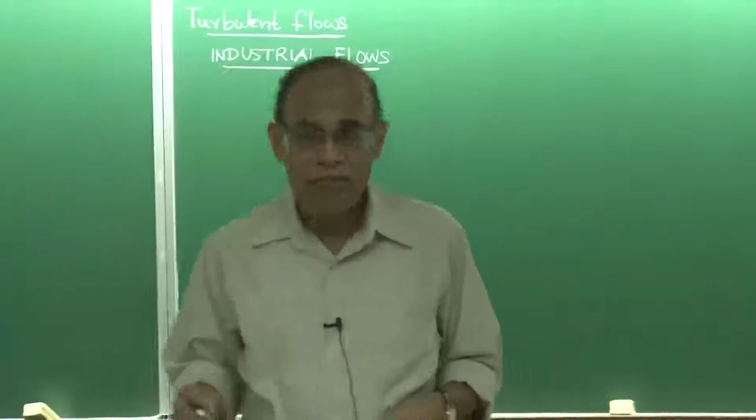So far I have classified flows on the basis of compressible versus incompressible flows, steady versus unsteady flows, one dimensional versus multidimensional flows, and another classification which I have just mentioned: the distinction between laminar and turbulent flow, where laminar flows are basically low Reynolds number flows.

Reynolds number, if you remember, involves the characteristic length and the kinematic viscosity in the denominator - it represents inertial force to viscous force. I have also briefly mentioned the dimensionless numbers that are important to fluid dynamics.

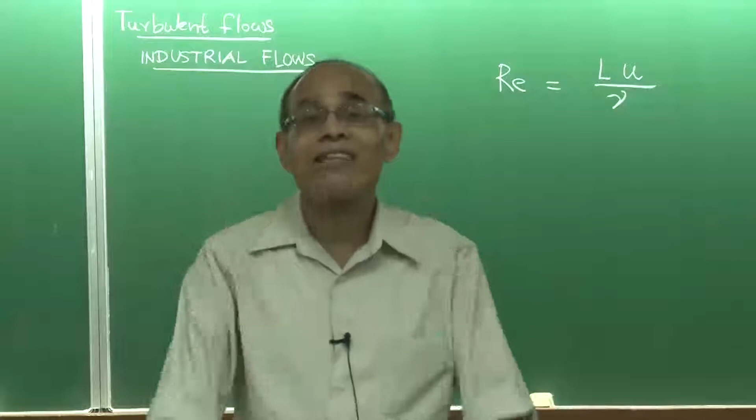If you remember the creeping flow around a sphere which I talked about in the context of Stokes law, there I was talking about Reynolds number of the order of 0.1 or less. So in such context, when the Reynolds number is 1 or less than 1, we see that the viscous forces are as important or more important than the inertial forces, and then the flow really becomes laminar.

But in contrast, if you get a value of 1000 or 10 to the power 4 or 10 to the power 6, which essentially means the viscous force is nothing in comparison to the inertial forces, that is when we see turbulent flows.

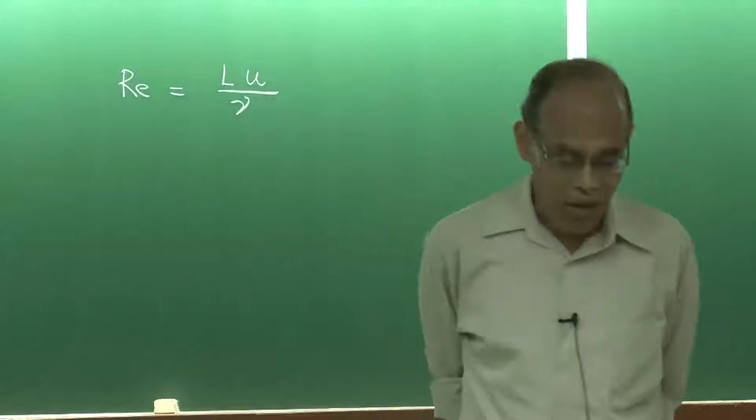Now, what are the general characteristics of turbulent flows? Turbulent flows are basically fluctuating flows. So if the flow is laminar, and if you put a probe inside, suppose this is the velocity and this is an instantaneous velocity.

Now, if I say I want to plot this as a function of time - so I have a reactor, I have put a probe inside located or targeted at a certain point, and suppose the system is under steady state condition, that means the velocity is not changing as a function of time.

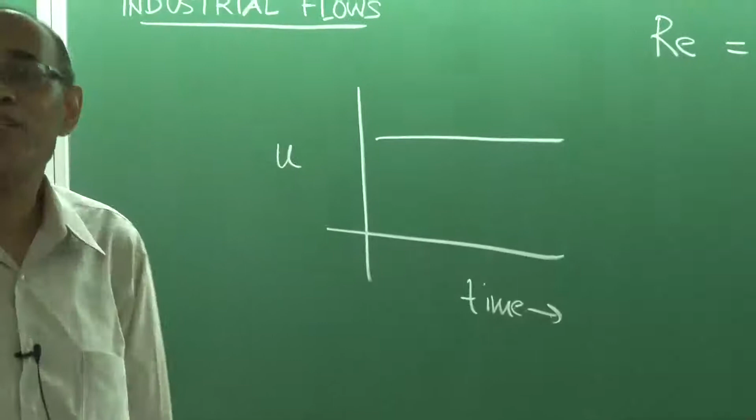So if it is a steady flow and a laminar flow, the characteristic response curve that my equipment or sensor registers will be a horizontal line parallel to the x-axis as a function of time.

On the other hand, if the flow would have been turbulent, we would have noticed high fluctuation superimposed on the mean line itself. So turbulence is basically fluctuating flow.

You can see that sometimes the velocity is above the mean line, sometimes it is down - so it is fluctuating around the mean line.

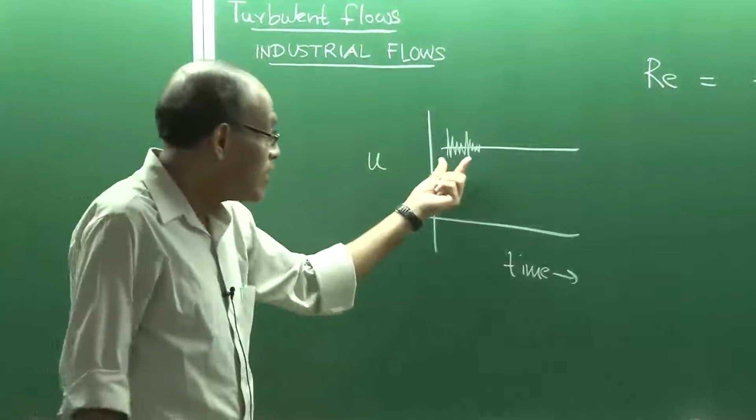These are characteristics of a steady turbulent flow, and these fluctuations have a frequency - if we are talking about low turbulence, the frequency could be something around 10 to 100 hertz. If it is very strong turbulence, we can have something like 1000 hertz or 1 kilohertz even.

Now, the characteristics of turbulence - it is said that it is basically chaos, but chaos need not always be turbulent. The turbulence originates in a system because it necessitates some shearing action.

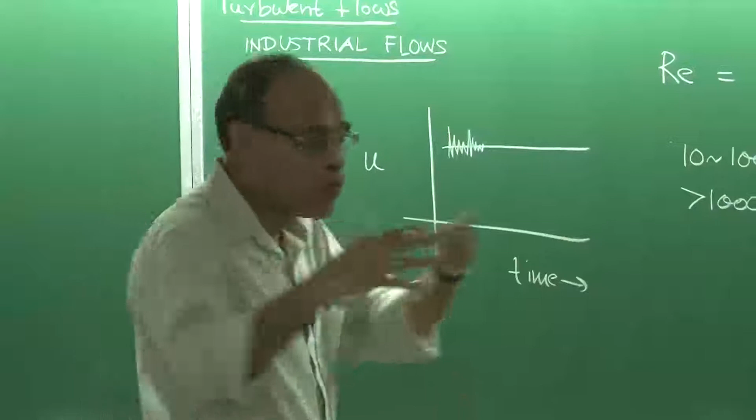So if you have no wall, for example, if there is smooth flow, in that case you may not see turbulent flow even at a very large Reynolds number.

So when you have a pipe flow at a very low Reynolds number, if we assume it to be laminar flow and fully developed flow, then what we encounter is a parabolic velocity profile. I have made half the deductions in class where I have not explicitly shown the Hagen-Poiseuille equation, but I have shown that if the flow is pressure driven and fully developed, simplifying the Navier-Stokes equation gives a parabolic velocity profile, as I demonstrated in class.

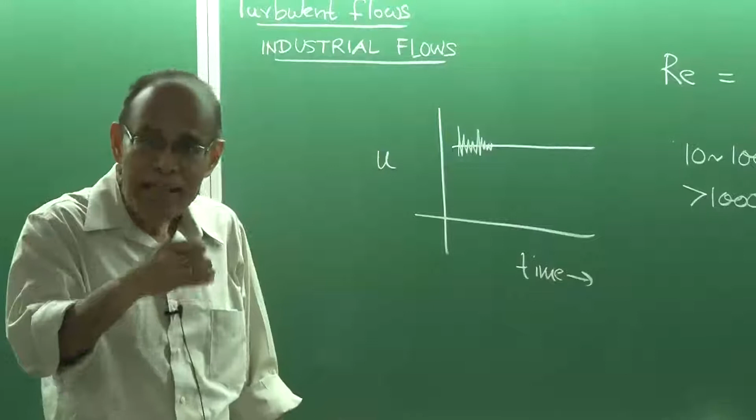That means if I drop an ink into the flowing stream of fluid, you will see that the fluid is following a certain path. It is neither fluctuating this way nor moving that way, suppose if it's in a fully developed region. So it has a streamline pattern along which the dye moves without showing any fluctuations.

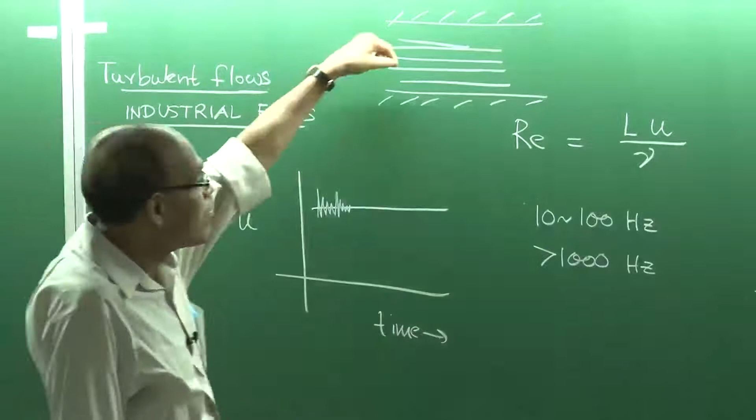But the moment the Reynolds number increases and you put a dye here, what happens? You will see downstream fluctuation, the dye will start to spread in the system, and that shows the flow has really become turbulent. So the disturbances may be due to the Reynolds number itself, friction at the wall, a bluff object, or additional reasons - some kind of disturbance has to be precipitated.

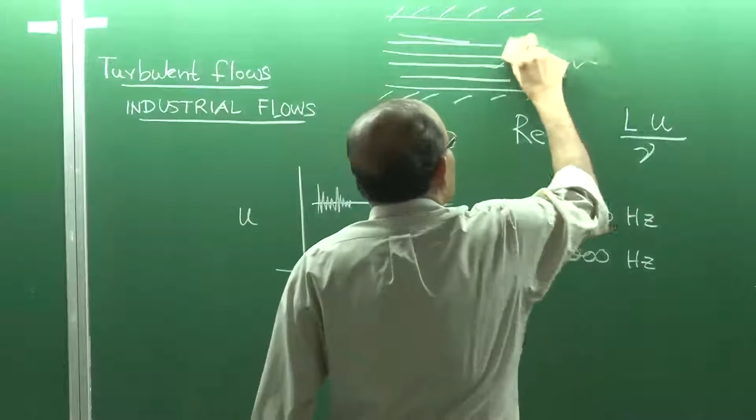So if you just increase the Reynolds number, the next stage - stage 2 - you can see the streamlines will be there, but somewhere a disturbance will set in. This is the disturbance I'm talking about that sets in when you increase the Reynolds number, and there flow separation is going to take place. So this is stage 1, you can see clear cut streamlines. In stage 2, the disturbance has precipitated into some kinds of local vortices.

Then in the third stage what you can see basically is something like this - you have a strong rotational motion, and these are the streamlines.

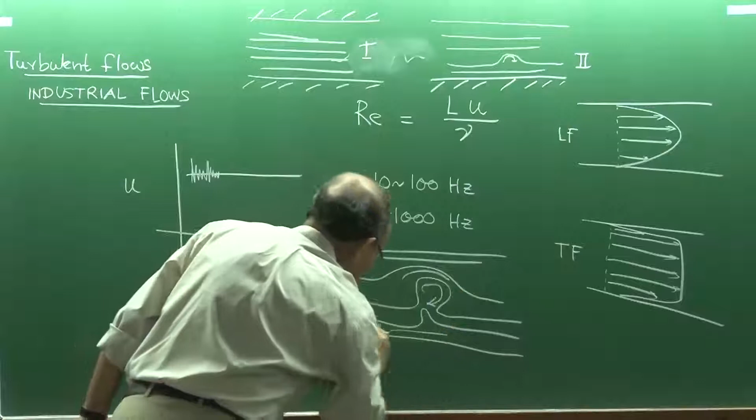As I've said, this sort of feature at high Reynolds number gets amplified and generated, and there could be various reasons for this. One important reason is, as you can see, there are walls here, so we experience shearing flows, and shearing flow is a necessary cause to introduce turbulence into the system.

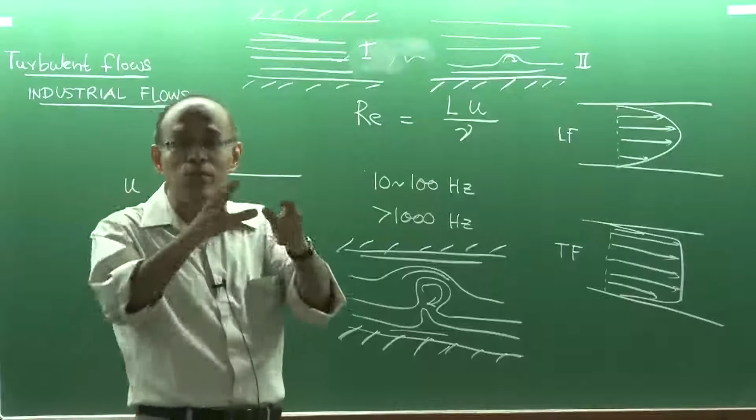If you have diverging flows, for example, that can also precipitate into turbulent flow or such rotational systems. Also, if you have bluff objects or solid objects, fluid strikes and flow separation takes place, which also generates turbulence. So shearing flows, walls, bluff objects, and diverging geometries are all features that precipitate the formation of these rotational disturbances.

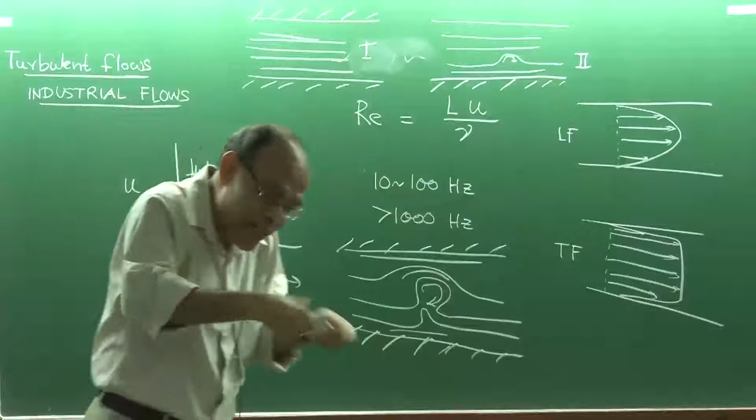Ultimately what happens is you have pockets of fluid, and at many places there are discrete rotating components, with a mean direction of the flow. These rotating components have their own rotation and advance along with the flow, but they themselves have a rotational component - these elements are called eddies in a turbulent flow, and these eddies move along with the mean path of the flow, having rotational components.

Therefore, we say that when you have turbulent phenomena, there is nothing like a one-dimensional turbulent flow. Turbulent flows could be a multi-dimensional feature. Turbulent flow is basically fundamentally an unsteady feature, because there is going to be velocity fluctuation in the instantaneous velocity all the time.

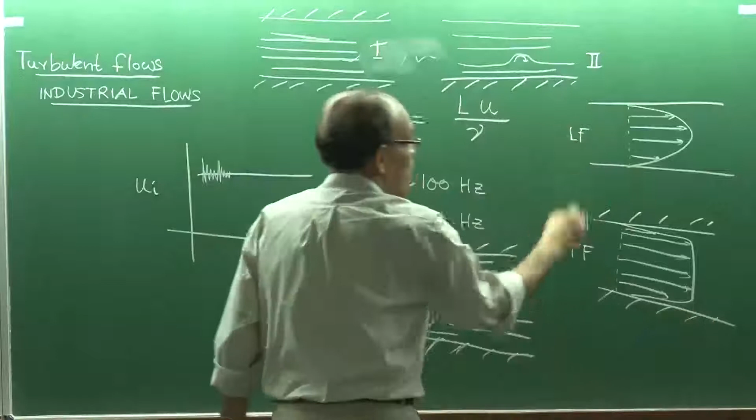This equation, as you all know, is equal to Vz. If z is this particular direction, then Vz is equal to Vz max into 1 minus r square by capital R square, where capital R denotes the radius of the vessel.

And in this particular case, the velocity profile is substantially changed, and it is equal to Vz max, and that is equal to 1 minus r divided by capital R, raised to the power 1/7.

So, most of the time what we are going to see is that a turbulent flow is essentially unsteady, essentially multidimensional, and essentially has a large Reynolds number also.

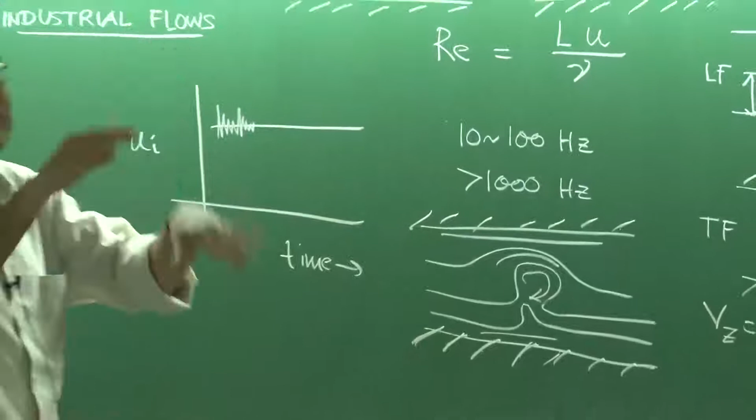Now, these rotating components which we have called eddies move along with the direction of the motion. The eddies exhibit random three-dimensional motions, where rotational characteristics are an inherent feature of turbulent flow itself. Now, if we plot the inverse of eddy size...

We must understand that the local Reynolds number is going to be much smaller here, close to the wall, but very large at the center. The local Reynolds number is small near the wall because the velocity is 0 there. If velocity is 0 at the wall, the Reynolds number is basically equal to 0, and as you go away from the wall, the local Reynolds number progressively increases.

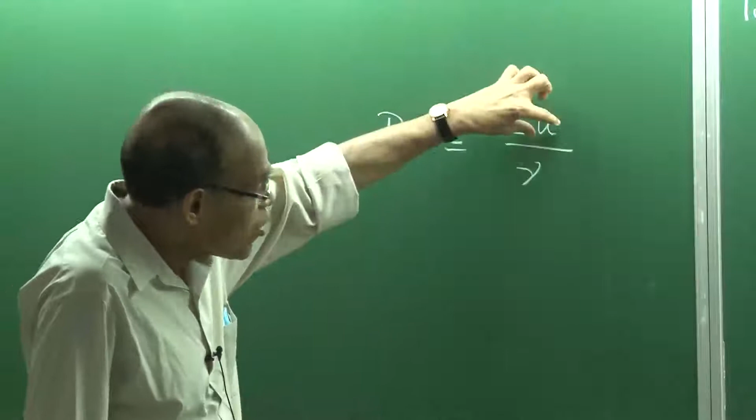As a result, you get bigger size eddies away from the wall, and as you go towards the wall, you get smaller eddies. Smaller size means a smaller Reynolds number for the eddies, so the eddying size has to be small, and the velocities themselves are small. So towards the wall, it becomes essentially a viscous flow.

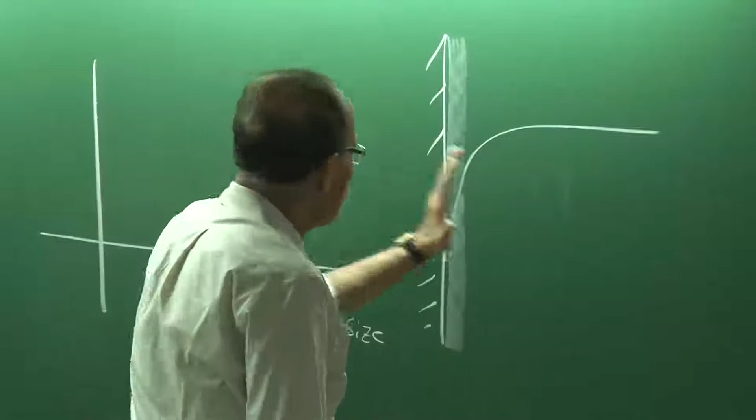So in that context, around a solid surface, as I have indicated, the flow can go something like this, and there is a concept of a boundary layer. If this is the solid, in that case we can have a fully turbulent regime here, and this is the other end, the solid wall.

This is how the velocity varies as a function of distance, say x, and this is a v versus x profile. So this velocity essentially starts at 0. If this is the scale of the velocity, this is v equal to 0, and then this becomes v equal to v infinity, or the free stream. This sort of variation gives rise to what is known as the velocity boundary layer.

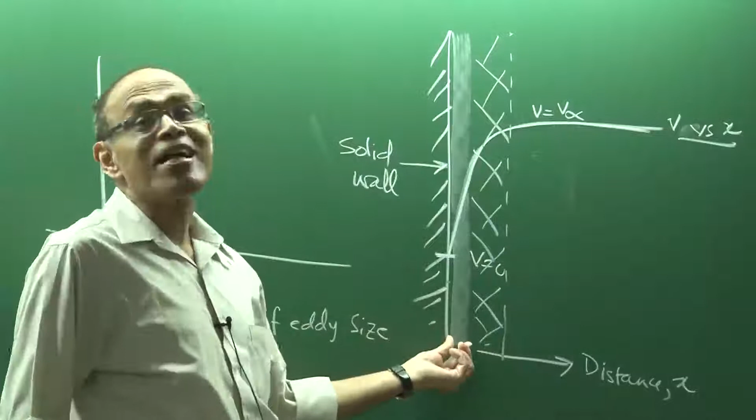In that boundary layer, we can have two different regions, or it can be separated into three different regions. One we call the laminar sub layer. Why laminar? Because here there is no turbulent flow, since velocity is approximately equal to 0, so the Reynolds number approaches 0.

Immediately after the laminar sub layer, you can have a buffer layer where the flow may be partly turbulent, partly laminar, because there is moderately high viscous force, but not entirely high enough to dampen the inertial effect. And then we go to the bulk, which is the main turbulent flow of the system.

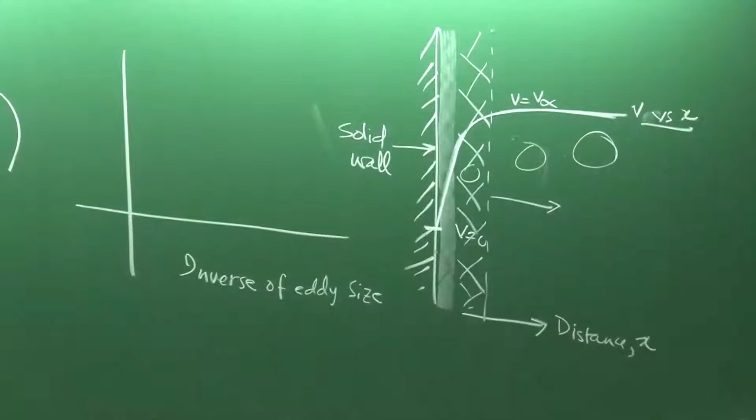Now, if we look at the eddy size distribution, we will have eddies here, here, and here. We will say bigger eddies occur here, because the velocities are going to be larger, and as a result the length scale is going to be larger. So here these eddies will contain most of the energy, and if we plot this eddy energy against inverse of eddy size, we get a graph like this, where this is small or smallest eddy, and this is large eddy.

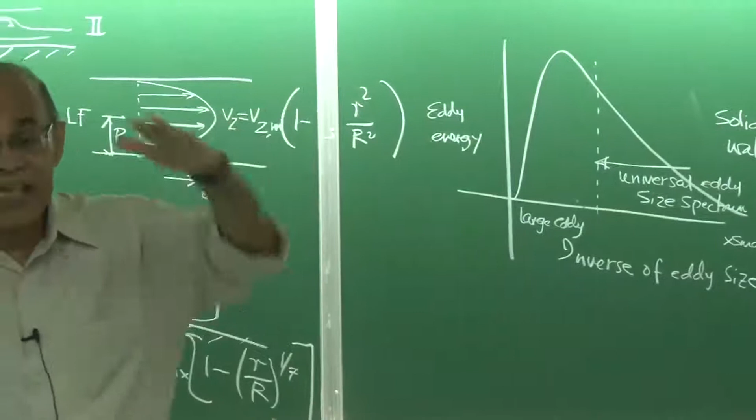And there, this part is called the universal eddy size. These large eddies contain the maximum amount of energy, and their size will depend on what kind of flow it is - whether it's flow between two pipes, parallel plates, or flow in a tank with a free surface and five different walls: two on the side, two on the front and back, and one at the bottom. This is one geometry, so we will have one sort of size of eddies there.

These big eddies are problem dependent, system dependent, geometry dependent, and their size is determined by the main characteristics of the flow, containing most of the energy. But if you go away from these main energy containing eddies, you enter a universal eddy size spectrum, which is characteristic of most shearing flows, and there you find the size we are talking about.

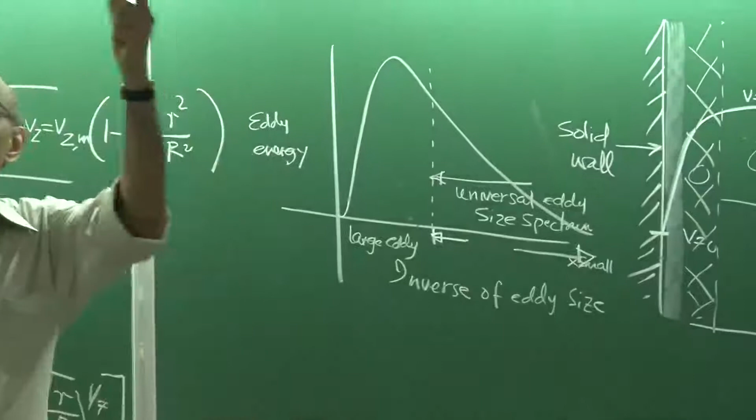Through this spectrum, energies pass from bigger to smaller eddies, smaller to smaller eddies, smaller to smallest eddies, and then ultimately it manifests as low grade thermal energy through the phenomenon we call viscous dissipation.

Viscous dissipation is negligible in the core of the flow. On the other hand, viscous dissipation becomes more and more pronounced as you go towards the wall, and that dampens the flow, bringing it to zero, where the Reynolds number will become zero and turbulence becomes non-sustainable.

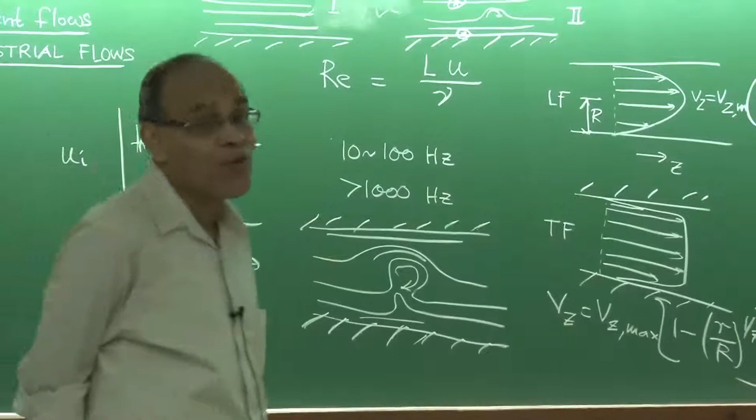Most of the industrial flows we encounter are going to be turbulent in nature, simply because we have high Reynolds number flows. Also, as I have said, turbulent flows are unsteady flows basically, and turbulent flows are multidimensional flows. So in industry or in metals processing units, we will mostly have unsteady, multidimensional turbulent flows.

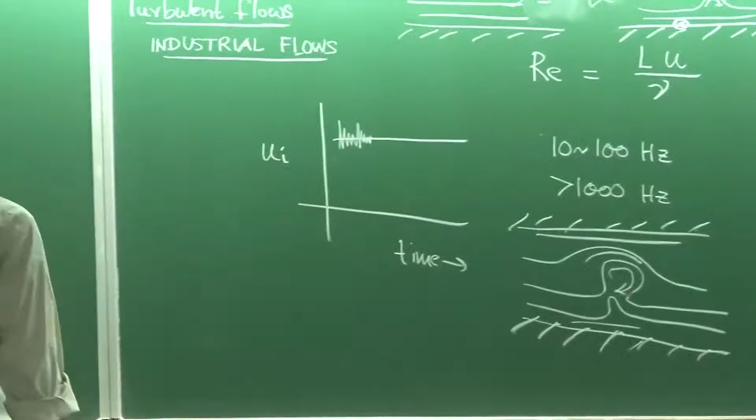That is going to be the characteristic of the flows we encounter, be it the flow of molten steel in a ladle, or the flow of electrolyte in an aluminum Hall-Héroult cell. All these flows are essentially turbulent because our kinematic viscosities are extremely small for metal, while the size of the industrial reactor is pretty large. So the characteristic length scale is large and the kinematic viscosity of the fluid is low, which makes the Reynolds number of the flow very, very high.

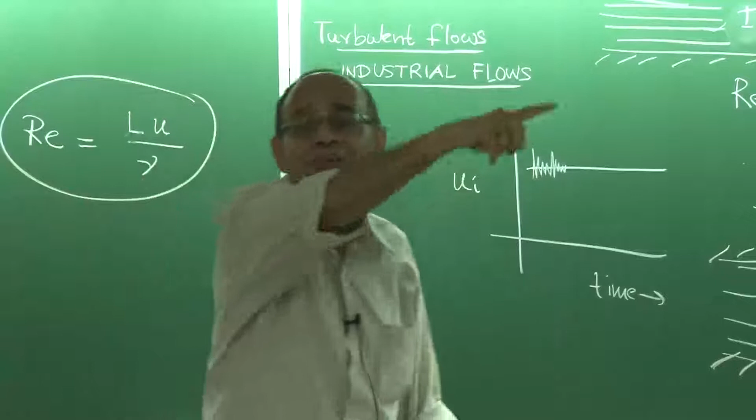So in industrial reactors we will mostly encounter high Reynolds number flow, or turbulent flow, and because our systems are bounded by walls and free surfaces, the flows are going to be mostly multidimensional. There will not be a predominant direction of motion. Within the container itself, the fluid will be recirculating, for example, because the fluid cannot go out of the container.

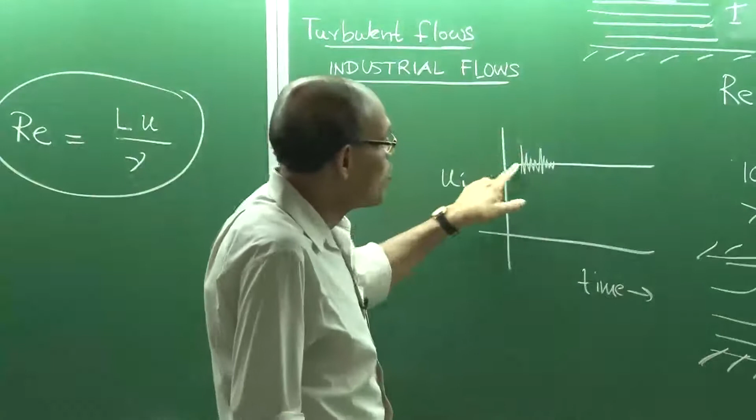Of course, the flow can be turbulent and can be unsteady also, because unsteadiness is a characteristic. But there is a formalism to deal with steady turbulent flow also - steady turbulent flow does not necessarily mean there is no fluctuation. It's a representation of a fluctuating flow with some sort of time averaging framework, so that you can extract meaningful information on the mean flow. You may not get exactly the fluctuating flows, but you can get the average of the fluctuating flows that determines or characterizes the turbulent flow itself.

One more thing I want to introduce is parabolic flow versus recirculating flow, in industrial flow context. In layman's terminology, parabolic flows essentially tell us that there is a predominant direction of motion.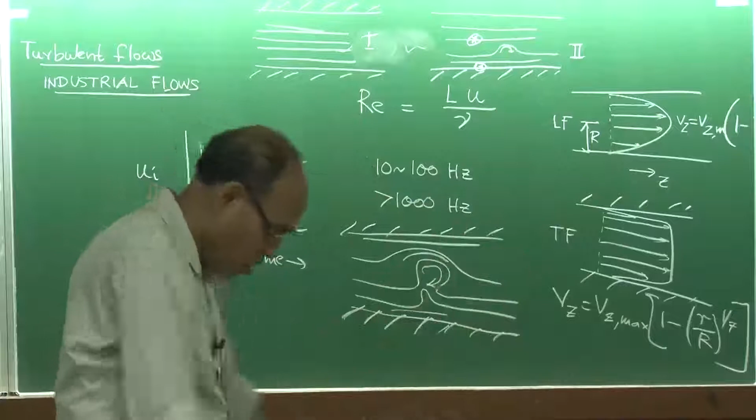So a pipe flow, for example - through the pipe the fluid is flowing along the z direction, moving from this side to this side. So there is a predominant direction of motion. There may be small motion in the transverse direction, but on the other hand, if you compare this to the flow in a vessel, for example in a cylindrical shaped vessel which contains molten metal...

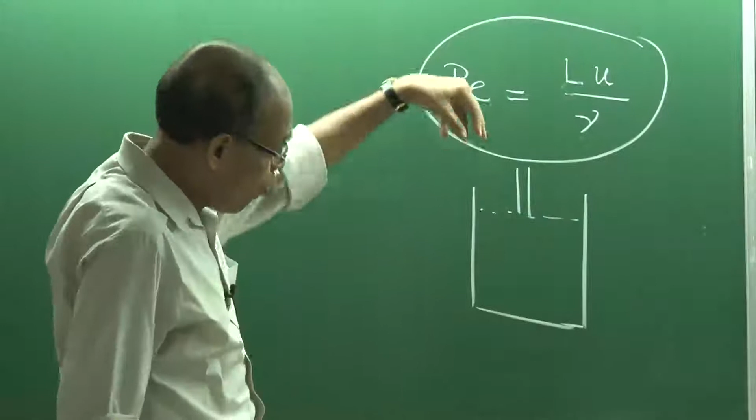Suppose you put molten metal or pour molten metal into such a vessel - this is the same scenario as you would observe in your bathroom, for example, when you open the tap just over the bucket. So what happens is the fluid in the bucket gradually builds up, and the flow in the bucket is a churning motion.

There is no predominant motion like what I have shown in the context of the pipe flow problem, where there is a predominant direction of fluid flow. This is the predominant direction of fluid flow, and that's how the flow is taking place.

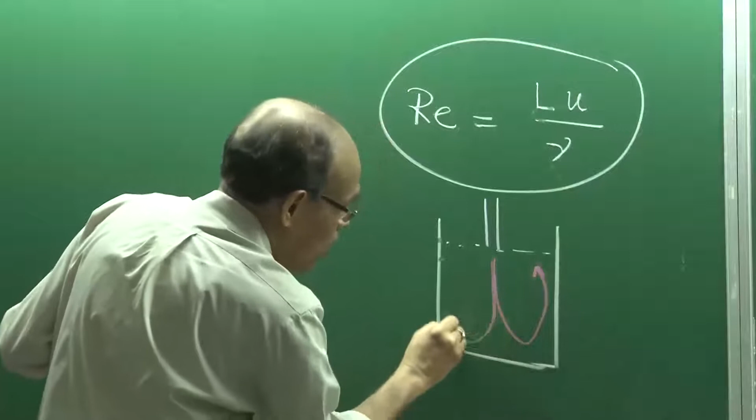This feature of a predominant one-directional flow is going to be absent when you pour molten metal into the vessel. When you pour molten metal, the meniscus gradually rises as you fill it. It's an unsteady state phenomenon, and you get a flow going in a particular direction - a clockwise moving vortex here, and an anti-clockwise moving vortex here. That is how the rotation really takes place.

You can observe this yourself. Next time you go to your bathroom, open a tap with a bucket underneath and do this experiment to see that you do not have a predominant direction of motion, but flow in different directions. The tap opens, the stream of water goes down, spreads at the bottom of the bucket, and then rises up from all sides of the bucket. This kind of flow, where we do not see any predominant direction of motion but has multidimensional flow characteristics, is called a recirculating flow.

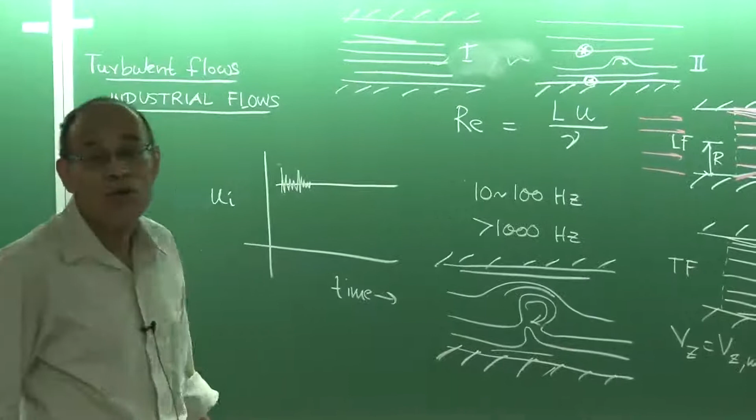So parabolic flows are those where we have a predominant direction of motion. Recirculating flows are those where there is no predominant direction of motion. Our industrial flows - for example, in the case of an aircraft moving high up - the flow over the aircraft could be unidimensional in nature, because the aircraft maintains a steady height and moves along a particular direction. There is a predominant direction of motion.

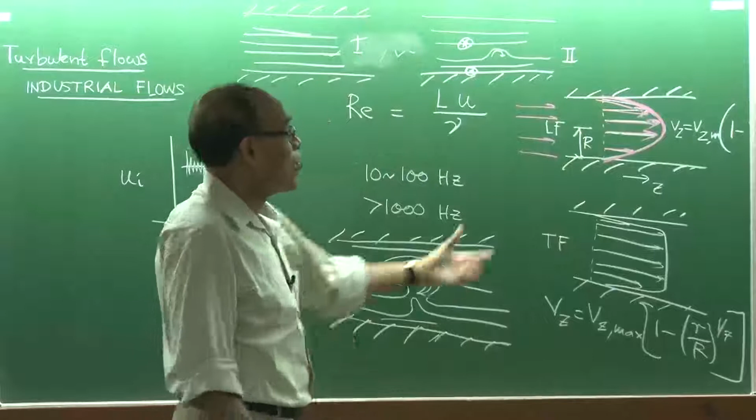On the other hand, in a metal processing unit, that sort of feature is not going to be seen. There are very limited scenarios where one can see a flow of this kind. One example is when you drain molten steel from a ladle, through a ladle shroud, into a tundish - the shroud looks something like a pipe. The ladle is there, with a shroud attached, which is a ceramic tube, and you drain molten metal into another vessel. The flow through this is akin to what I have shown here.

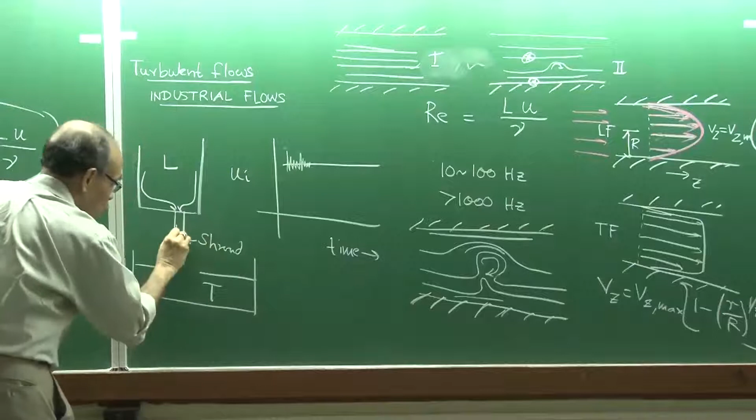So the flow here is predominantly one-dimensional through the shroud, but within the tundish itself, the flow may be multidimensional. This is the ladle, this is the tundish, and this is the shroud, which is a ceramic pipe - here the flow could be basically one-dimensional. But these are very special kinds of scenarios. In general, the flows we encounter in metal processing or liquid metal processing industries are going to be mostly recirculating in nature.

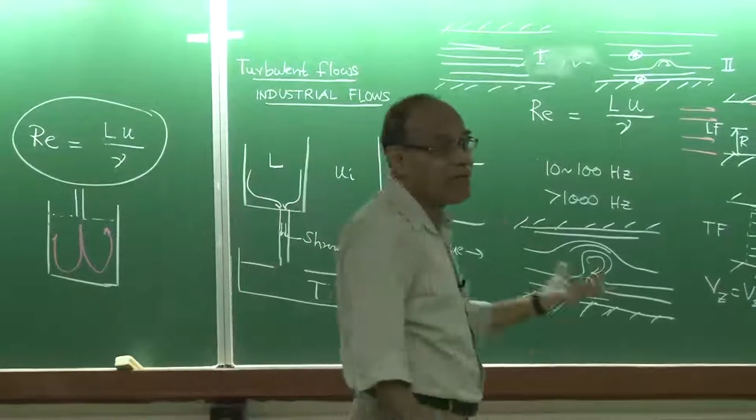Now, having said so, let us also understand that the Navier-Stokes equation I have written in its exact form retained the unsteady term - the 3 first order derivative terms on the left hand side, and the 3 second order derivative terms on the right hand side. So I did not make any assumption whatsoever, and the equations presented were the exact derivation.

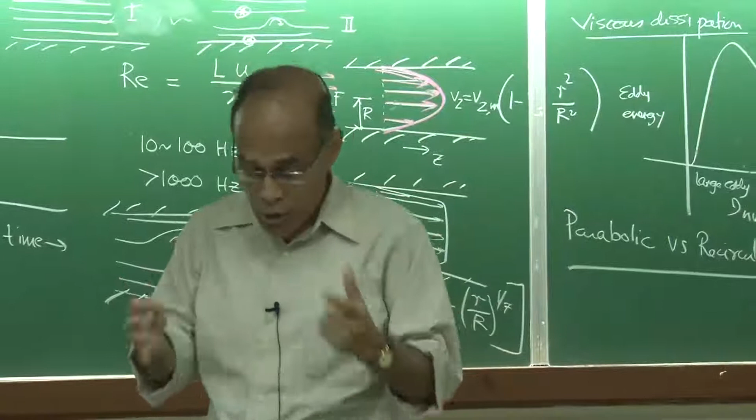In deriving those equations, no assumption was made about whether the flow is laminar or turbulent. So the Navier-Stokes equation as presented could be equally applicable to analyze laminar flow as well as turbulent flows. But there is a problem in trying to analyze turbulent flow with the Navier-Stokes equation, which I am going to discuss right now. The equations I have written, as I mentioned, do not make any flow characteristic assumptions.

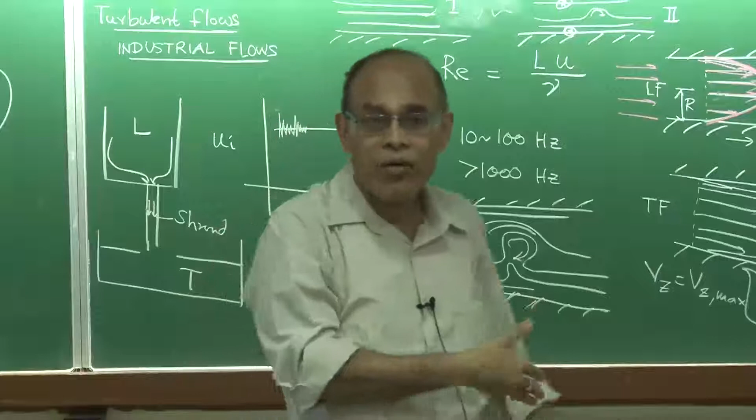The flow is either laminar or turbulent, which essentially implies that we can apply these equations to laminar as well as turbulent flows. But if you look at the equations, these equations are x direction momentum balance, y direction momentum balance, z direction momentum balance, continuity equation - 4 equations, 4 unknowns. They are non-homogeneous partial differential equations, they are non-linear equations, so they will basically not be amenable to analytical solution.

This is what the analytical solution comes out by simplifying the Navier-Stokes equation, making the fully developed flow assumptions, constant property, steady state, and all these assumptions, and then we could derive this by working it out with hand. But when you apply the Navier-Stokes equation in its entire form, because we have to apply an entire form, because no simplification is possible.

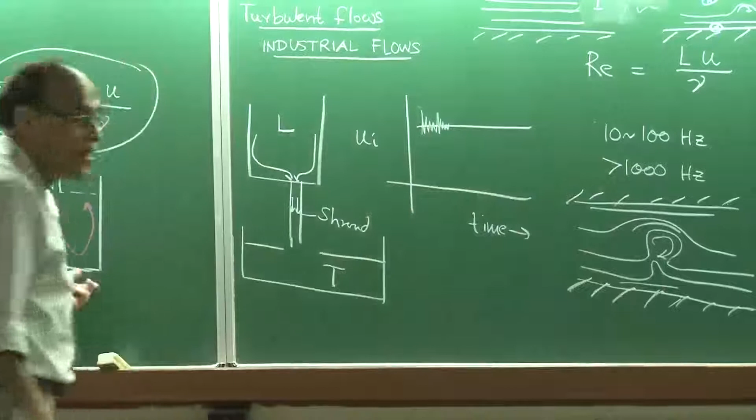It is unsteady state, it is multidimensional, it's high Reynolds number, it is turbulent. So therefore, no simplifications are going to be available here, and in that case we have to deal with the exact form of the Navier-Stokes equation. So that poses a problem that we will not be able to solve these equations by hand.

So we will have to have computational methods. We have to write a computer program in order to solve those equations. Now, there are many solvers which are available, or we call them commercial softwares, which are available to solve the Navier-Stokes equation.

So you just define the geometry, define the boundary conditions, and the 3 equations, or the 4 equations - that is the equations of motion and equation of continuity - they are going to be applied.

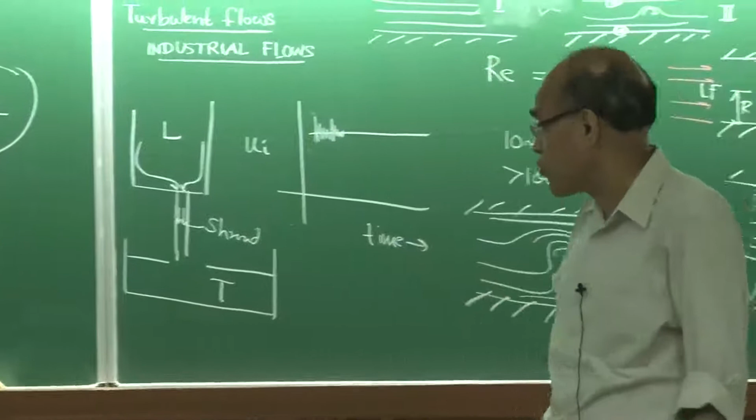So a numerical procedure: we have a differential equation, a partial differential equation, we apply a numerical method, then you get algebraic equations. And these algebraic equations are actually solved by the solvers, which we call commercial softwares.

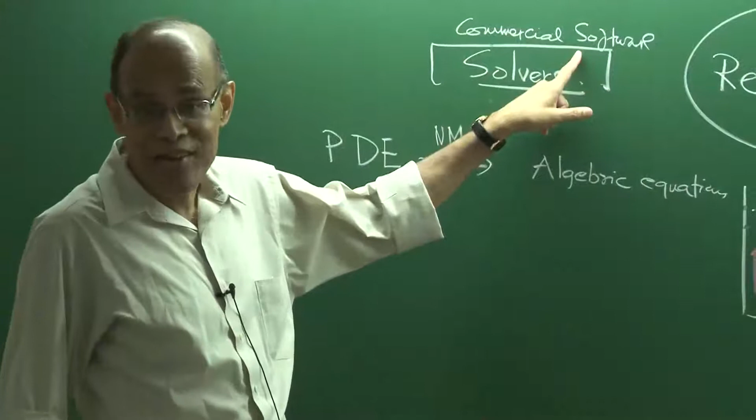Many of you will have a chance to use this commercial software during your tenure at IIT Kanpur. One such software that we have is Fluent in ANSYS. The other we also have, I think, is the COMSOL software, which allows you - they are Navier-Stokes solvers basically.

And you can have many permutations and combinations. You can solve a 3-dimensional problem, you can solve a steady problem, you can solve an unsteady problem. Your job is only to define the geometry and lay the numerical grids.

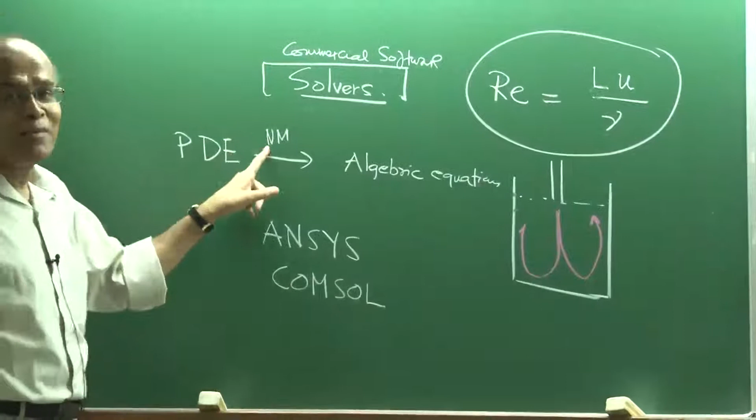Now, so what is the task of a numerical method? The numerical method is applied to transform a partial differential equation or an ordinary differential equation into its corresponding algebraic equation. So therefore, in order to know these solvers or do something tangible through them, you have to know the numerical methods also.

So this is an entirely different subject actually we will now get into - that if you want to solve the Navier-Stokes equation which you have derived in this class for actual industrial flow, in that case you cannot do it by hand, you have to write a computer program. Writing a computer program takes an enormous amount of time.

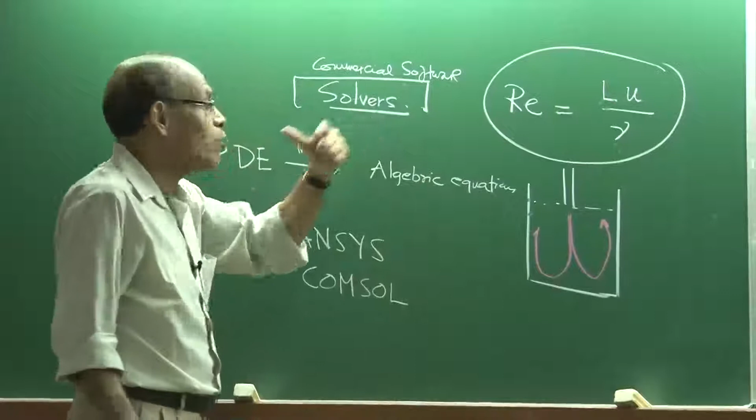So you take recourse to industrial solvers or commercial softwares, and these commercial softwares will be allowing you a platform to solve those Navier-Stokes equations which are applicable to your system. So as I mentioned, partial differential equations are transformed using numerical methods, and then you get algebraic equations, and these algebraic equations are solved - not in a continuous fashion, but at certain points which we call grid points.

So in a 2-dimensional domain, a grid is going to be constructed, and then these are grid points - I can say, or we can write like this also. So these are the nodal points at which we will seek the solution of the algebraic equations.

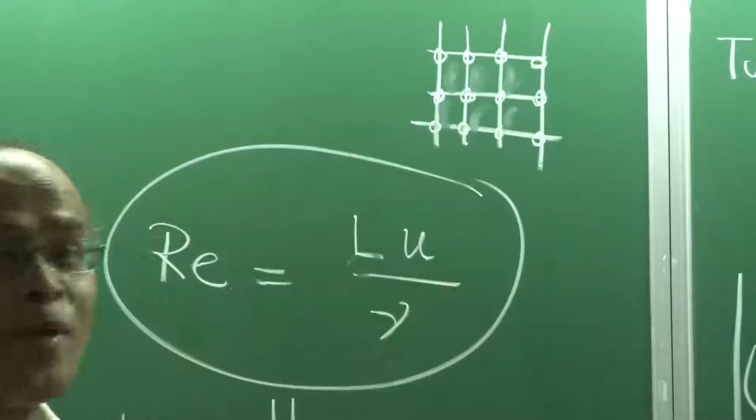So the domain discretization is done, a numerical grid is constructed, because you will apply a numerical method, you got the algebraic equations, now you have to solve these algebraic equations. For every node you will get one algebraic equation. So you will get many algebraic equations over the entire domain, and these you have to solve simultaneously.

So if you imagine a very large domain, you can have millions of such nodes and you can have millions of algebraic equations. So therefore, you will require a powerful computer in order to solve this.

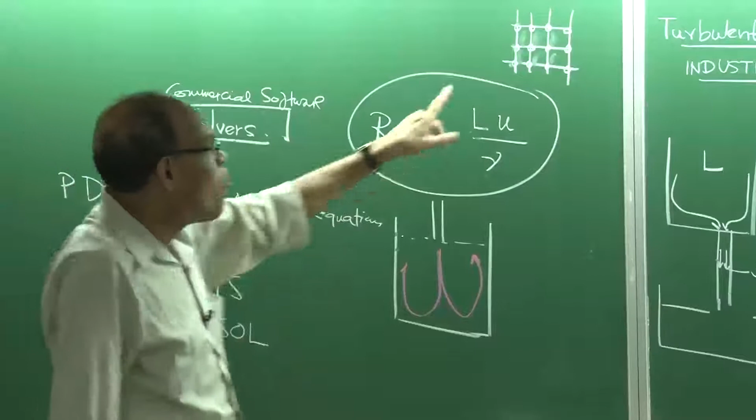Now, the moment you apply these numerical grids, what happens is that, if you remember, as I said, you have large eddies here, you have small eddies here.

So if the grid is not fine enough, then if you have a small eddy size, this kind of grid distribution will not be able to resolve the motion of the smallest size. Therefore, it becomes a big problem to apply the Navier-Stokes equation as it is and try to simulate an actual industrial flow problem.

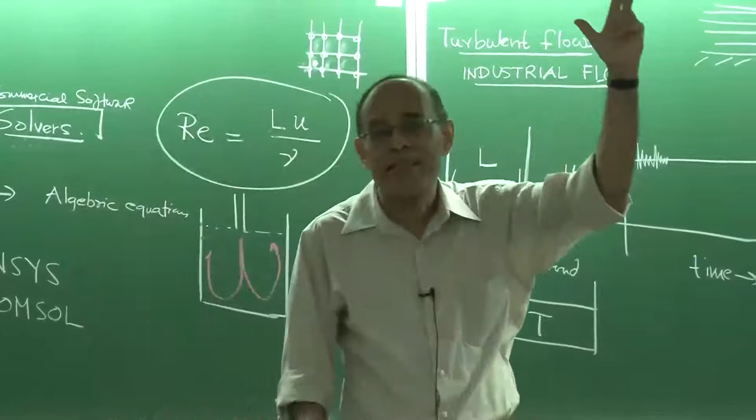This arises because you require a very fine grid to resolve motion across the length scales, from smallest eddy to largest eddy. If you want to simulate everything in a huge domain like 5 meter by 5 meter, the size of a metals processing reactor, you may need 10 million, 20 million nodes. And with unsteady state flow and small time steps, one calculation could take 1 month, 3 months, 5 months.

We have not been able to do this for our full scale reactors, this kind of simulation where we can resolve exactly the motion across all length scales. If you can resolve this, that procedure is called direct numerical simulation.

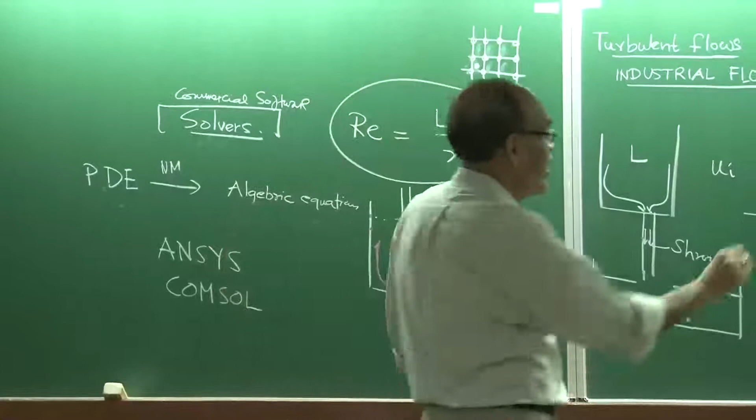Direct numerical simulation means you have not made any assumption in solving the Navier-Stokes equation. You apply a computer program, solving the equations across the length scale, and you are able to predict the motion, or calculate the velocity fields.

This is DNS, direct numerical simulation. It is an exact simulation of turbulent flows, but it is very expensive and time consuming for actual industrial flows. So we really do not do it for every analysis of every problem.

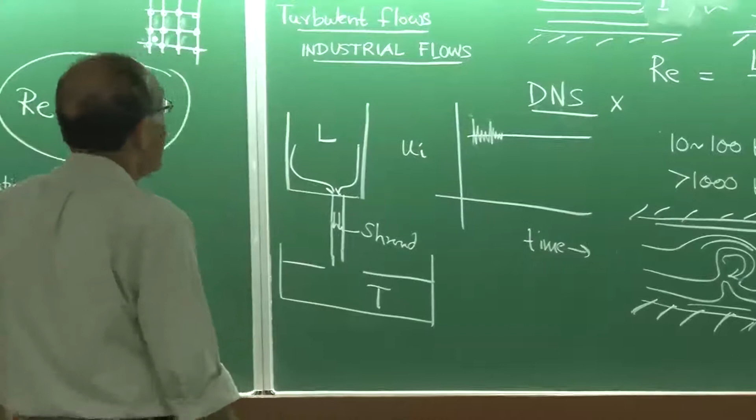So we resort to a mechanism called time averaging of flows. We will time average, and then by time averaging we will solve the Navier-Stokes equation. We now have a time averaged Navier-Stokes equation. Let me brief the time averaged Navier-Stokes equation.

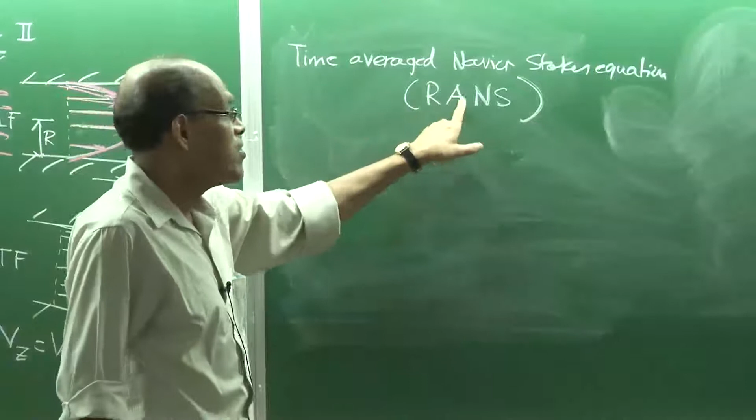This approach is also called in the numerical world as RANS, Reynolds Averaged Navier-Stokes Equations. The moment we time average, we will also have a time average equation of continuity, time average equation of x direction motion, y direction motion, and z direction motion. So we still have 4 equations, but in their time average form, and these 4 equations, as opposed to the original Navier-Stokes equation, are the time average Navier-Stokes equations, or in short RANS.

As I said, you have an instantaneous velocity, and this instantaneous velocity can be decomposed into a fluctuating velocity. Suppose it is an x direction velocity: that x direction velocity is a sum of the x direction time average and the fluctuation of the x direction velocity component. Similarly, we can have other components for y and z. Now the time averaging is basically done like this, and if you do this, the definition is as shown.

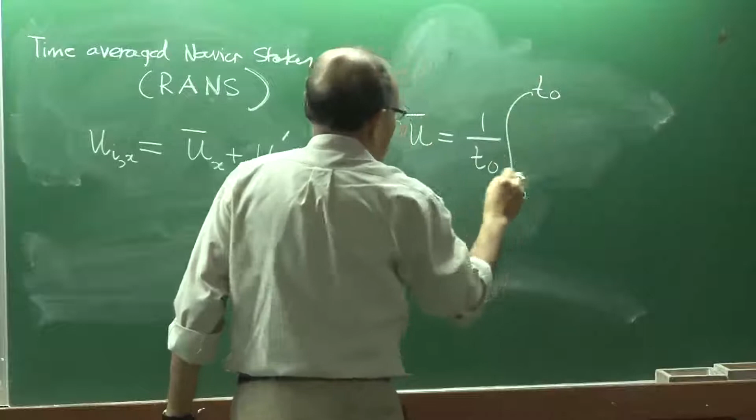We have to remember that the limit of integration matters, because we are time averaging it. So you can imagine that one is called space averaging, the other is called time averaging.

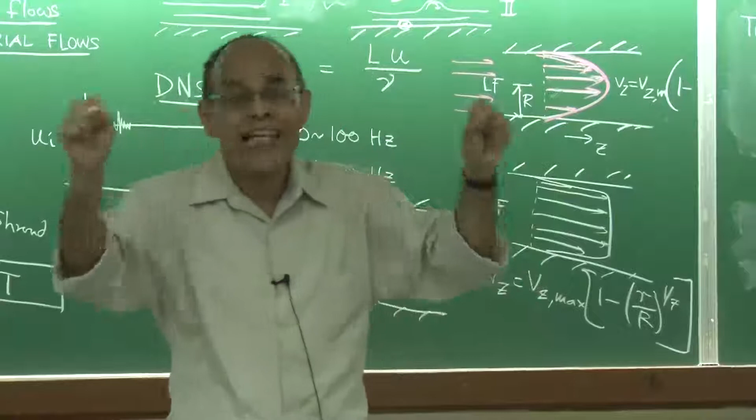Suppose you want to find time averaging in the context of rainfall in a certain month. Day 1 so much rainfall, day 2 so much rainfall, so what you are doing with day 1, day 2, day 3 is using these as time frames. So that number for the month of January or July is actually a time averaging of many data points collected over that particular month, giving you one representative value.

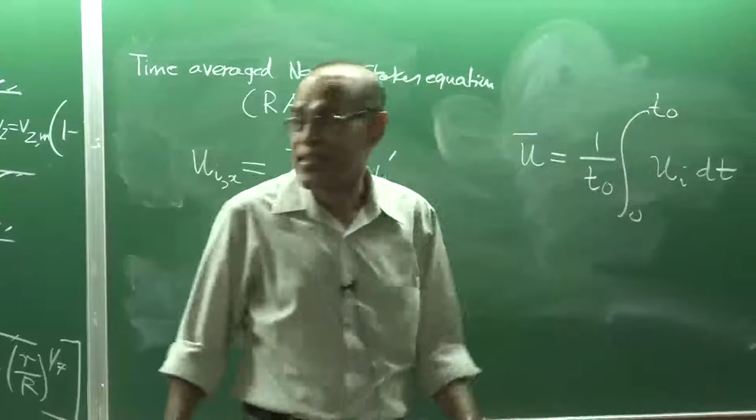So, that is basically the definition. One important characteristic here is the limit of integration must be higher than the frequency of fluctuations, because I want to capture, if I have one fluctuation like this over a time span 0 and t0, I am not capturing the fluctuation at all. So, the time span over which time averaging is done has to encompass a sufficiently large number of fluctuations.

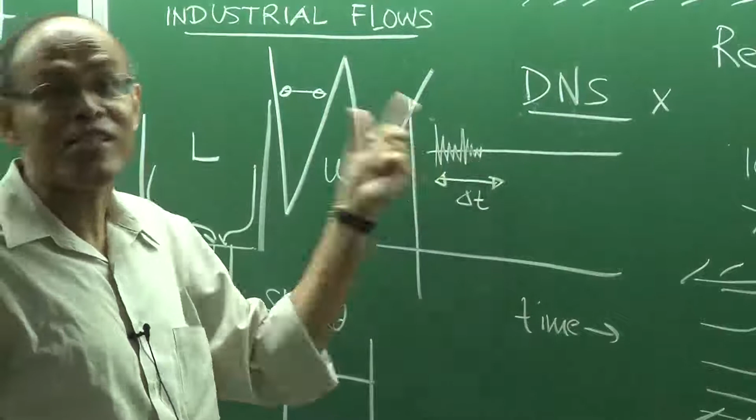So, I would say a delta t, a differential time, which is equal to t0 minus 0. That delta t must contain a large number of fluctuations, so this time period must be larger than the time period of fluctuations of the turbulent flow.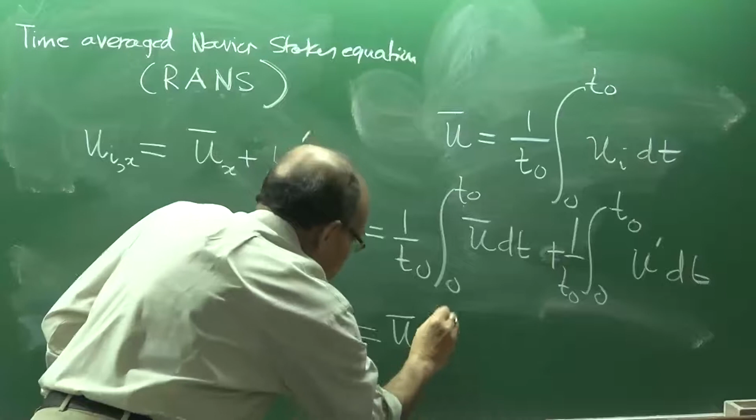And then you can see that this basically comes out to be the definition. This term u bar, as you can see in this figure, is not dependent on time, because this is a horizontal line. This is the time average part itself, so this is not a function of t, and so this can be taken out of the integral. So, I can say this is u bar, and then the integration of this is t0 divided by t0.

And that is what. And this part is equal to 0. Why? Because there are positive fluctuations and negative fluctuations, and if you sum them all up, the positive and negative fluctuations annihilate each other, and therefore you land up with the time averaging of this definition giving you that it is equal to u bar.

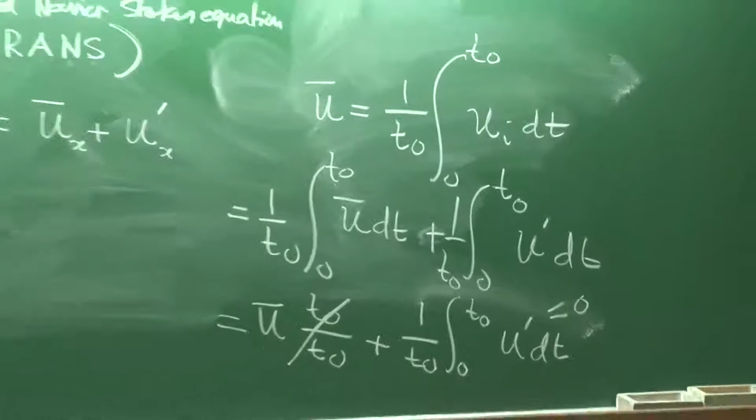So, based on this we should be able to derive a form of the Navier-Stokes equation. For example, I will show it for one dimensional, even though turbulence is not a one dimensional phenomena. So, let us look at this.

Let us look at this equation, which is the continuity equation, and then these are instantaneous velocities now, because we are applying this. I will write it v instantaneous, and then this is w instantaneous, and that is for incompressible turbulent flows, and then we say it's a 3-dimensional scenario.

So, this is z, and w is the velocity component, this is x, as I have written here, u is the component, and this is y, or I will write it this way, v, and then this is z. This is a better convention, writing the z-axis along the vertical direction, but anything can go, you can change it, there is absolutely no problem.

So, this is now the Navier-Stokes equation. Only thing is that earlier when I wrote the Navier-Stokes equation first, I did not say anything about u. Now, I am saying let us interpret that u as the instantaneous velocity. If it is laminar flow, then whether you write it ui, or u bar, or u, it does not make any difference. But by writing ui, you essentially mean that you are talking about instantaneous flow, and then you understand that because I am talking of instantaneous flow, maybe I am talking about turbulent flow.

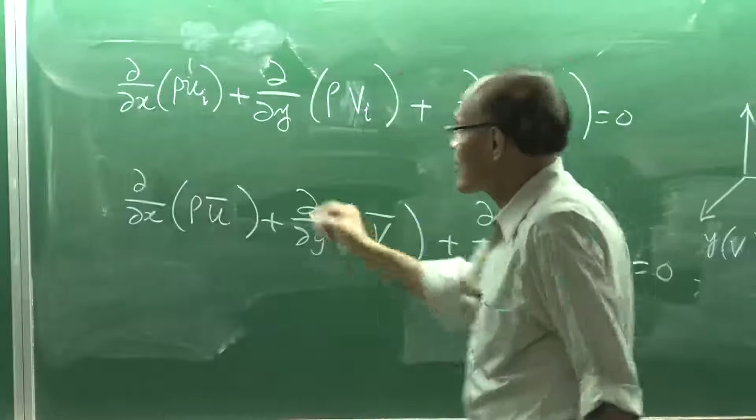In which u bar, v bar and w bar are the time average components of the instantaneous velocity as I have defined here. Because the moment I write it into two parts, let us do it like this. So, this is going to be this, we will have u bar, and then we are going to have it. So, we forget about rho, we can take rho out, and then we can have

u prime. And then once you do the time averaging operator, then we have rho and 1 by T0, and then we say, look, this term is going to be time averaged, so 0 to T0, and this is going to be u bar dt, and this is going to be T0, and this is going to be u prime.

This term, as I have indicated to you, already is equal to 0 because of the cancellation of the fluctuations, and this term will come out to be u bar. So, you are going to get this term; even though we have this term, its contribution is going to be equal to 0. So, it applies to this term also, it applies to this term also, no problem.

So, if you take the overall mass continuity equation, and if you write them not as ui, vi, wi, but as u bar, v bar and w bar, then you will interpret that you are talking about the RANS, or the time average equations, or we can say that is a time average equation of mass continuity. Now, let us look at...

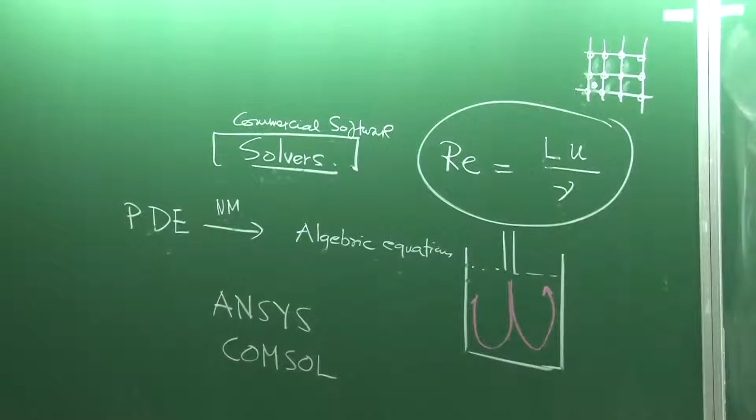We should have started discussing the problems today, but now let us look at the Navier-Stokes equation, for example, taking one direction term, or the terms along one particular direction. If you remember, as I said, the moment I write the equations, you should be able to visualize yourself.

So, let us talk about the Cartesian coordinate system. Let us look at the x component of the motion, let it be a multidimensional flow, and write down only the first order and second order terms pertaining to the x direction equation of motion. Along the x direction, if it is horizontal, we have an unsteady term, 3 convection terms equal to pressure gradient term and 3 diffusion terms, and there is no component of the gravity. That is the general case of the x direction momentum balance equation.

Of this, let us pick up just one first order term, because the treatment for the other two first order terms is going to be similar. So, this is what it is: we have rho u i into u i now. This is the fate of the first order term. Earlier it was rho u u, now it is instantaneous velocity, and then we have a corresponding term on the right hand side.

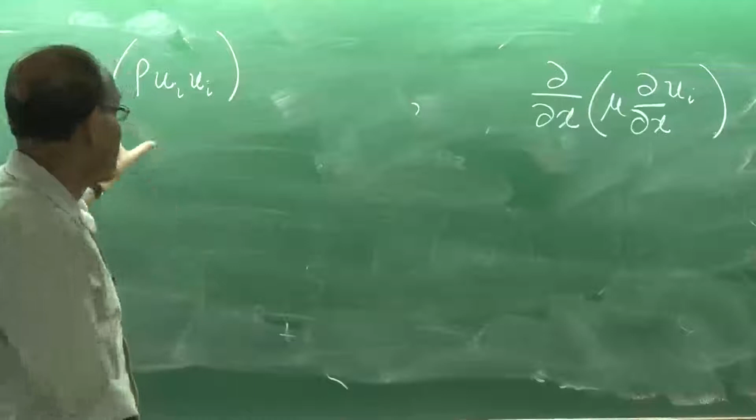We have to now time average it. So, I have just expressed it, now I need to time average this. Now, if we substitute in place of this, the time averaging, as I have indicated, will yield you this term.

Because u prime time average is going to come out to be 0, as I have indicated already. So immediately the second order terms can all be interpreted not with the instantaneous velocity u i, but with u bar. So, you can write the 3 second order terms on the right hand side with their corresponding bar. But what happens to this term?

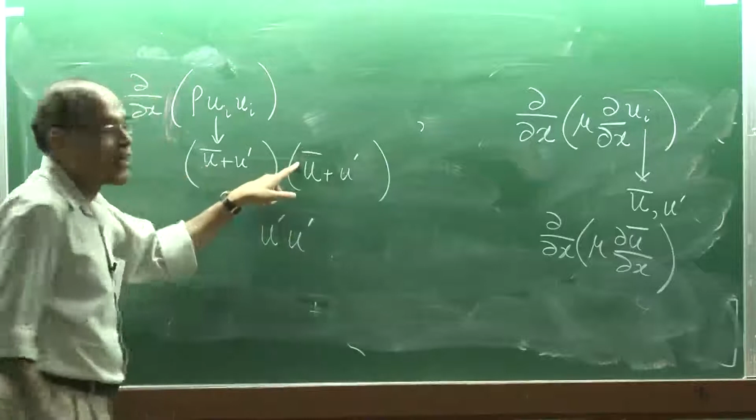This term, when you multiply it, what happens is that you have an unknown correlation which will surface. The first term, both have time average values, so time integration or time averaging is no problem. The second term multiplied by this will come out of the integral, and its time averaging will become equal to 0. So, from here you are going to get two different terms only.

One is associated with u mean into u mean, but the other is the time average of this particular component, which we represent like this. This essentially means that it is this particular term with an over bar above it.

Now, we have no mechanism to get this correlation, this velocity product of fluctuating velocity components. So, therefore, if you remember, we have 4 equations: 1 equation of continuity and 3 equations of motion. Similarly, we have u bar, v bar, w bar and p bar. So, 4 equations and 4 unknowns, clear cut. But the time averaging has produced an additional term like fluctuating velocity squared. Where from do you get the information about the fluctuating velocity?

So, these are unknown correlations which have appeared in the equation as a result of time averaging, and to get information on this, what do we do? This is called a closure problem.

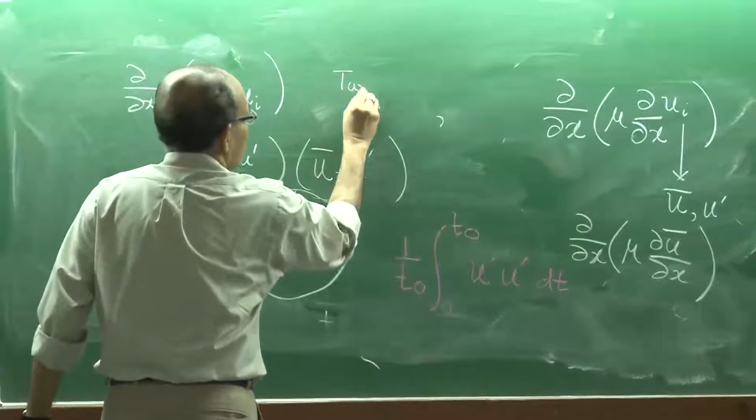Time averaging produces higher order correlations, higher order meaning second order terms with fluctuating velocity components which are not known. So we have 4 equations, 4 unknowns, and this is an additional unknown. Somebody has to supply that correlation before I can say I have 4 equations and 4 unknowns. So who will supply this correlation?

These correlations come from what we call turbulence models. This is a very big subject, and I do not want to get into it.

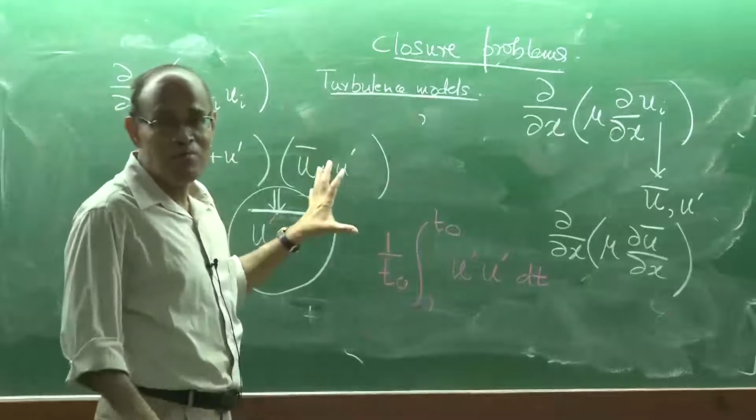Time averaging produces unknown correlations which are not known. So then my equations are not closed, because I have more unknowns than the number of equations. I have to close this problem, bring it to the form where I have as many equations as unknowns. So I will apply a turbulence model, and this turbulence model will give us information about these fluctuating velocity components. Now if you look at these terms, rho, u prime, v prime, time average, this has the term of...

This is called Reynolds stress. If you multiply, these are basically stress terms, density multiplied by the product of fluctuating velocity components; when different velocity components multiply, this gives us what is known as turbulent shear stress, and when the same components multiply, turbulent normal stresses. They have the dimension of stress or momentum flux, associated with fluctuating velocity components. We call them not laminar or molecular shear stress, but turbulent shear stress.

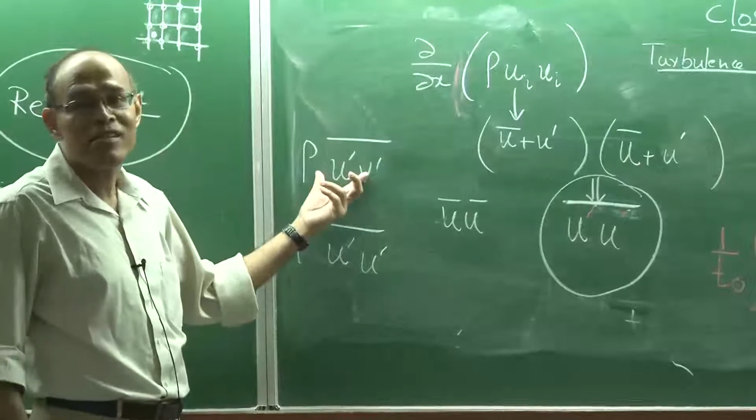So how do you estimate this turbulent shear stress? There will be different components of course, because you have u, v and w, but that is a subject we do not talk about in this course, and you can assume that is known as the turbulence model.

So to summarize, if you apply the time average form of the Navier-Stokes equation, you will have to apply a turbulence model to close the set of equations. There are a good number of choices available. You can pick one of those turbulence models, and the turbulence model together with the Reynolds equations will give you a complete framework for analysis of turbulent flows in industrial reactors.

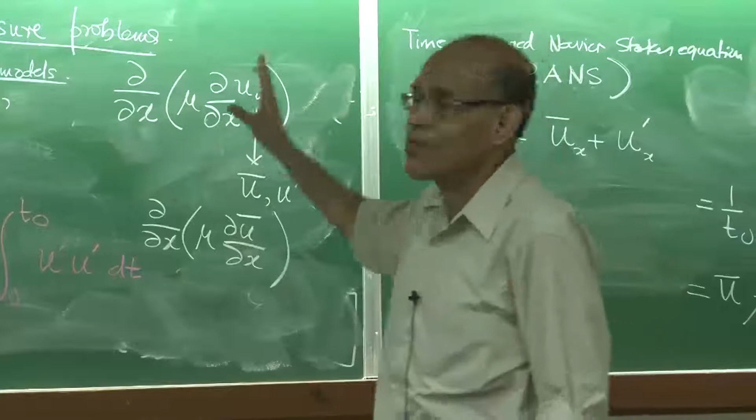From this point onwards, one can go into the details of turbulence models, but there is no scope to discuss such things in this particular course. It is sufficient for us to know that the exact Navier-Stokes equations we have derived are equally applicable to turbulent and laminar flows.

But applying them to real life turbulent flows creates a problem, because we want to resolve all the motions, and we want very fine grids, which increases the calculations to 10 million, 20 million equations, making it impractical even today. So we want an alternative way to address turbulent flow, and the most popular and common approach used in metallurgical engineering is the Reynolds approach, or time averaging.

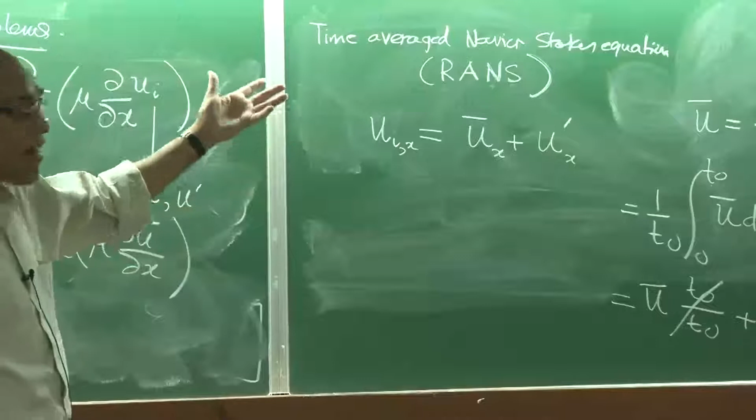As I said, if you want to apply the time average Navier-Stokes and continuity equations, you need a turbulence model, and that turbulence model is needed to close the set of equations to have prescription or values of the Reynolds stresses. How you get this exact equation, the way of deriving turbulence models, or what these turbulence models are, we do not discuss.

So I think the discussion about turbulent flows and industrial flows is over. That means whatever I was supposed to cover in these 6-7 lectures has been covered. In the next class we are going to solve some problems, and those problems will of course be simplified, because as I said, solution of the exact Navier-Stokes equation is not possible.

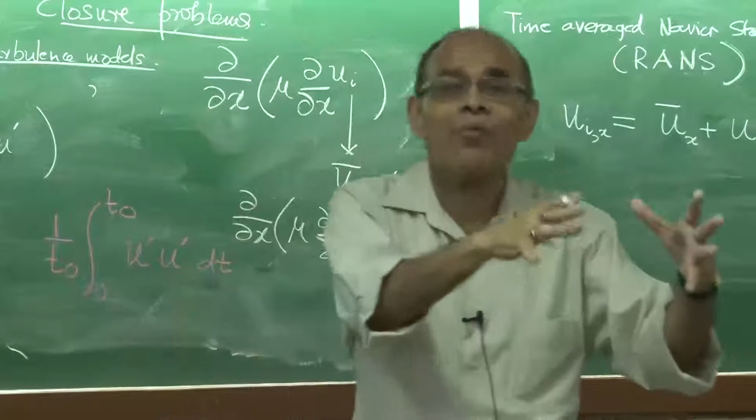You have to go to the computer center, use software, etc. So we will solve those equations in simplified forms: steady state, fully developed flow, constant property flow, and so forth. A few examples I will work out. I will also give you a sheet of assignments, and you will solve those equations to get some expertise in tackling and solving problems, getting useful information out, and in the process gaining the necessary fundamental knowledge. So we will continue.